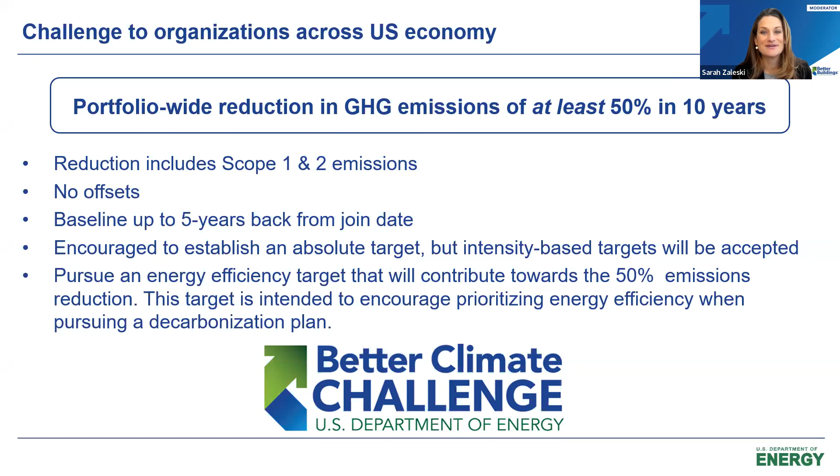Across manufacturing, the public sector, and commercial buildings have already joined the Better Climate Challenge. If you're interested in learning more or joining us, please reach out to your Better Buildings contact or visit the Better Buildings Solution Center.

Next slide, please. I also wanted to share with you a program called the Design and Construction Allies, which was launched last year. This is a program of leading architects, engineering, and contracting firms that are committed to helping enable routine design and delivery of zero energy and zero carbon ready buildings, and to identify and address barriers to delivering these buildings.

So we know that architects, engineers, and contractors are crucial and important to buildings because decisions made by these folks impact buildings' energy use, their carbon emissions, operating cost, and comfort. And I'll note that it's both operating carbon emissions as well as embodied carbon that these stakeholders can have a really important impact on.

So we see this community playing a key role in helping building owners, many of whom I know are on the phone today, achieve their energy and climate goals. We'll be hearing from one of the members of this ally working group later in the call today.

I wanted to share this because two of the areas this working group has chosen to focus on in the next couple of years are: one, cultivating client demand — really being able to share with their clients the strategies, including financing strategies, and ways to make it pencil out to build and retrofit ultra high performance buildings. The other working group is really focused on embodied carbon, so we'll be hearing a little bit more about that today, and obviously it's the focus of today's webinar.

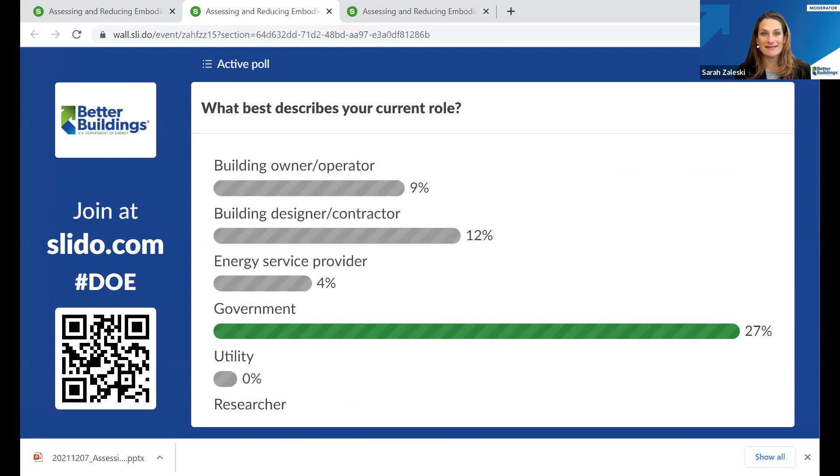So we'll have two more quick polls. One, what is your level of familiarity with embodied carbon? This is kind of from one, I've never really heard of it, two, general awareness of what embodied carbon is, three would be basic understanding of what it is and how to choose what low embodied carbon opportunities exist. And then after that, really a solid knowledge or really considered an expert in embodied carbon and implementation.

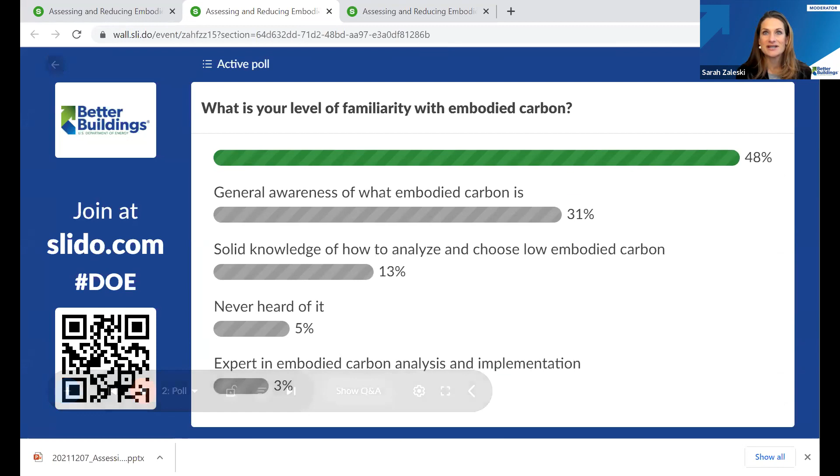This is very helpful. Thank you all for taking the time to share this with us. Okay, so it looks like about half of you are about in the middle, some basic understanding of the opportunities. And there's about a third of you all that have a general awareness of what embodied carbon is. And then we have, it looks like 2% of us on the call are experts in this space. So thank you for joining us as well. I know it's a rapidly evolving space. I know here at DOE, we're thinking more and more about this space, whereas traditionally we've been more focused on operational carbon. So it's a pretty exciting and evolving area.

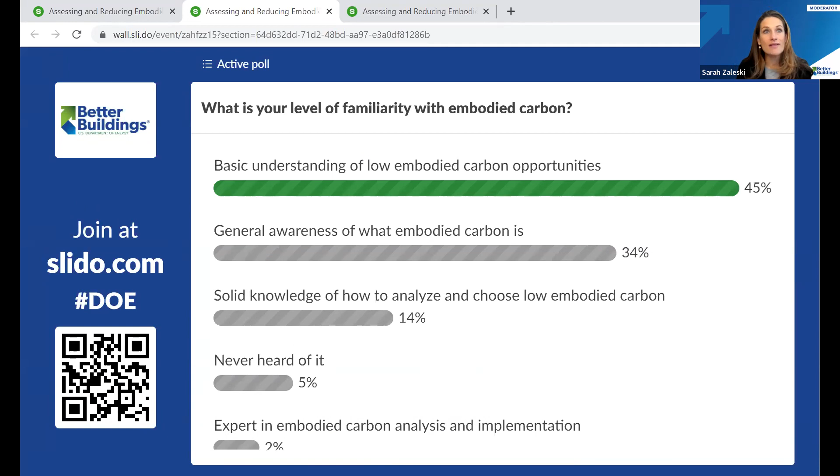Okay, and then one last poll before I introduce our speakers. So what are you most interested in learning today? Feel free to choose more than one response here. So everything from what embodied carbon is to why it's important, where to find resources to learn more, and how to make decisions to lower embodied carbon in projects.

Okay, thank you for this. So it looks like the clear winner is how to make decisions to lower embodied carbon. So I'm pleased to say that I know what our presenter is going to be presenting today. And I think, and I know that we're going to be able to discuss that in some depth. So that is great to hear.

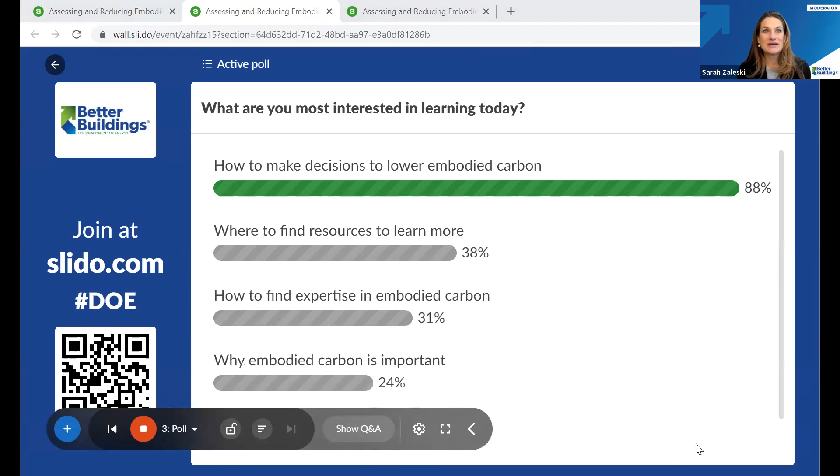All right, without further ado, I am excited to present today's great lineup of presenters. So if we can go to the next slide. The first speaker we'll be hearing from is Victoria Herrero-Garcia, and she is a senior sustainability and carbon project manager for Ambient Energy, a Mead and Hunt company. She enjoys initiating embodied carbon conversations with design teams early in design and helps develop sustainability strategies to achieve carbon reductions. So Victoria is going to really be giving us a bird's eye view. She's worked in this space for quite a long time, covering what embodied carbon is, why it's important, some of the tools out there, how to think through some of the methodologies.

After Victoria, we'll be hearing from Ryan Poole, who leads sustainability for DPR Construction, which is a technical builder with offices spreading globally. DPR is innovating sustainable practices for how they operate, build, and ultimately help change the world. Through strategic partnerships, Ryan harnesses the power of collaboration and unity to provide influence towards creating a healthier future for all. So Ryan's going to really be giving us some additional tools and look at it from the contractor perspective, and what kind of value the contractor can bring to reducing embodied carbon in your projects and some of the tools that they've used at DPR.

And then lastly, we'll be hearing from Anna Duffy. Anna is a sustainability manager at Hudson Pacific Properties with years of experience in commercial real estate ESG programs. In her current role, she manages key sustainability initiatives such as driving progress towards Hudson Pacific Properties' science-based targets and net zero waste by 2025. She also furthers the company's decarbonization strategies, including efforts to reduce embodied carbon in both their developments and redevelopments. And we'll be hearing from Anna really from the building owner and developer perspective of some of the steps that they've taken at Hudson Pacific Properties to reduce their embodied carbon, and some resources available to building owners to do the same. So thank you again all for joining us today.

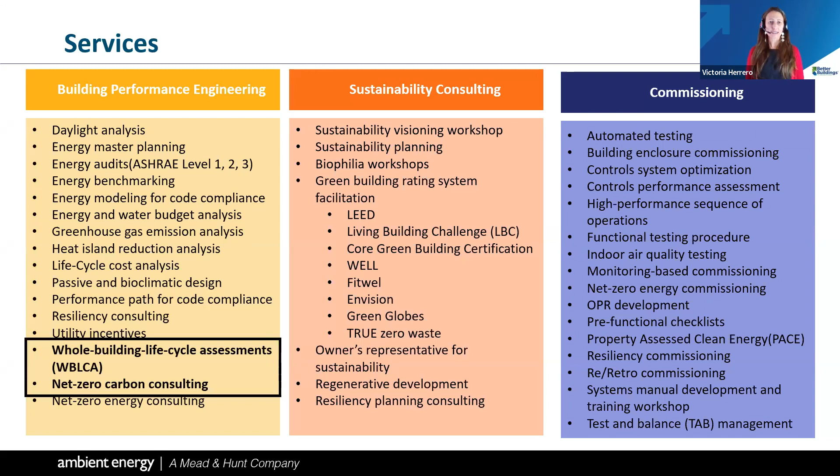To start with the differentiation of what operational carbon and embodied carbon is, for those not familiar: operational carbon is the carbon that is emitted once the building is completed and occupied, and is related to the operations of the building. The embodied carbon is all the emissions related to the materials being used in the project, transportation, installation, replacement, and end of life.

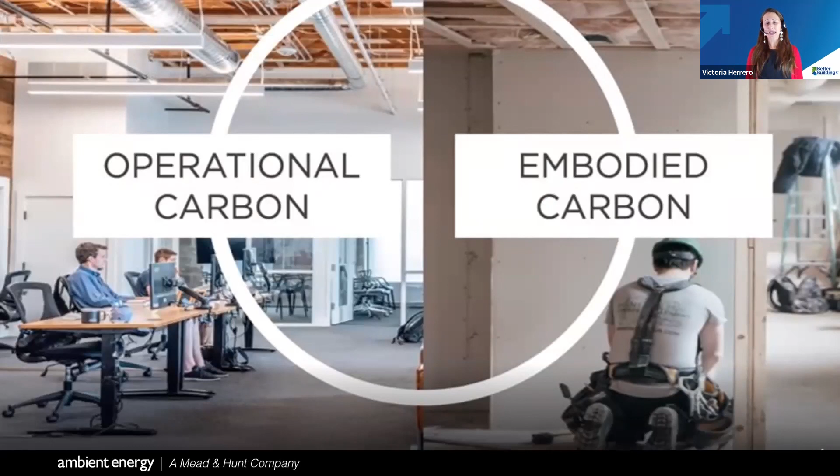As you can see here, that is what I just described. The embodied carbon includes all these stages, including extraction as well, and is also known as global warming potential, GWP. The unit of measurement is kilograms of CO2 equivalent, and the little 'e' comes because it can include other greenhouse gases, not just CO2.

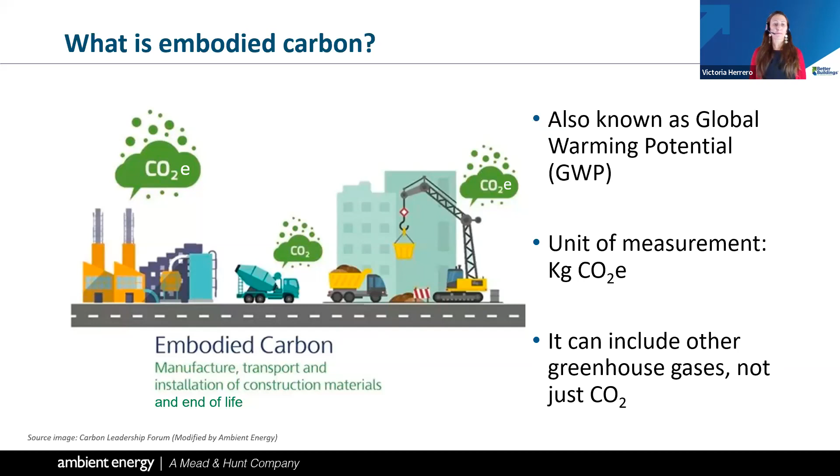Why does embodied carbon matter? When we look at the big picture of global emissions by sector, we can see that the yellow part of the pie accounts for 11% if we only talk about core and shell. But when we include other building materials, we come to a conclusion that it's about 21% of the total global emissions.

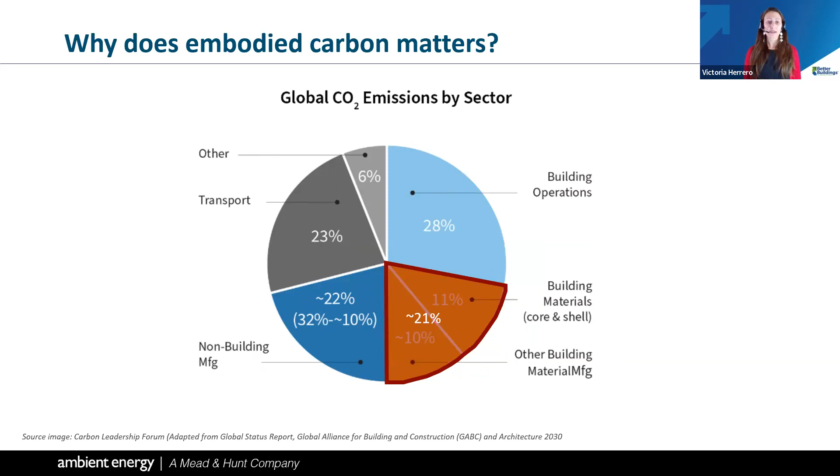It's very important to be aware of this, because we are projected to add 2.5 trillion square feet of new construction within the next 39 years. That means building an entire New York City every month, approximating to 468 New York cities total. That is a lot of new construction.

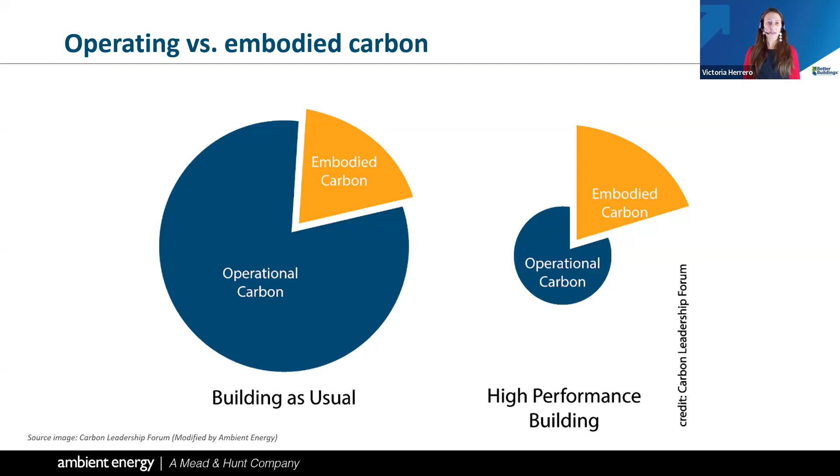As you all are aware, climate change is the single greatest challenge of our time, so we need to know what we can do today.

From the last Glasgow COP26, there was a report generated by the Climate Action Tracker. There's a lot of information here, but the key things I want you to look at are the different scenarios using policies and action, 2030 targets, pledges and targets, and where the global warming will end up under each scenario.

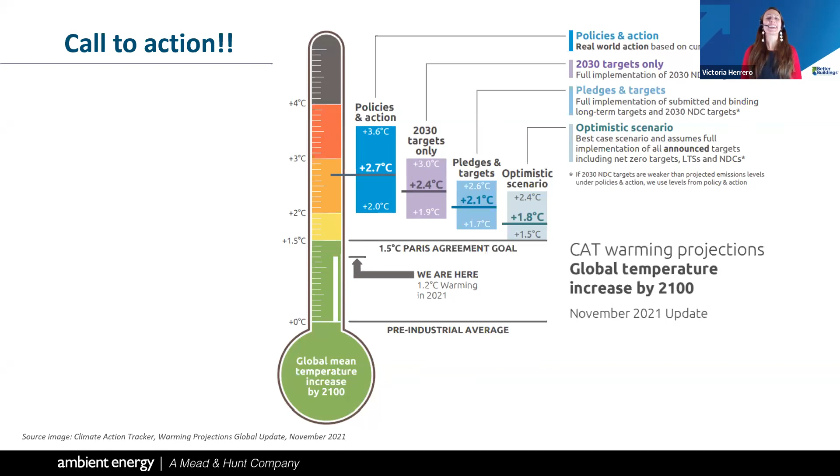The most optimistic scenario is that if we do everything that has been announced, all the targets and policies in place, and generate long-term strategies, we can get to 1.8 degrees Celsius, which is a little bit higher than 1.5, but that is where we're trying to get.

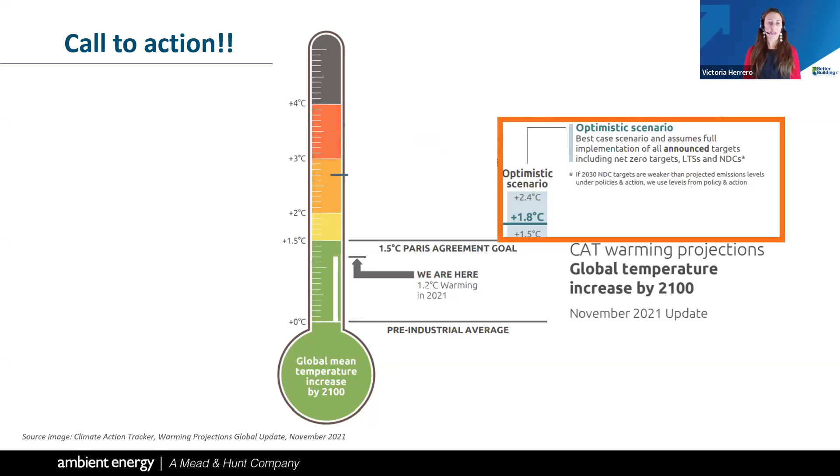So where we are today, here in the United States: you can see on this map there is a state Buy Clean legislation that has passed, and this is all in relationship to embodied carbon. There are other states and cities that have policies, or are trying to pass similar clean legislation.

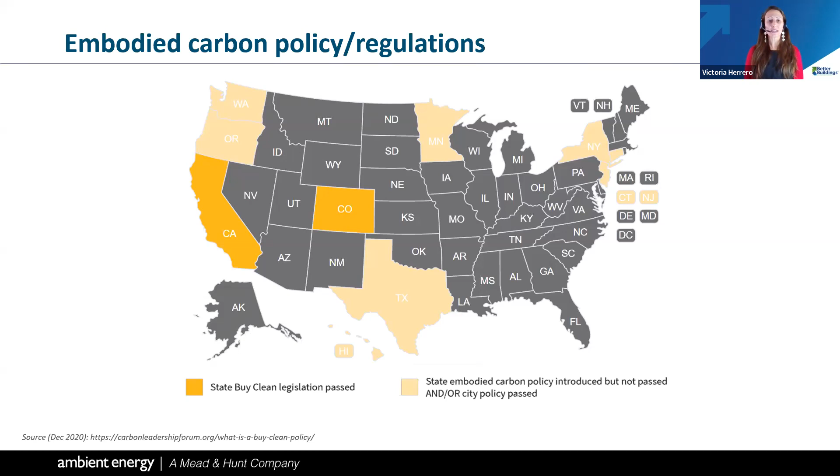If you go to the Carbon Leadership Forum's website and look for the policy, the city policy toolkit has an interactive map where you can learn more about what is being done and read about the policy.

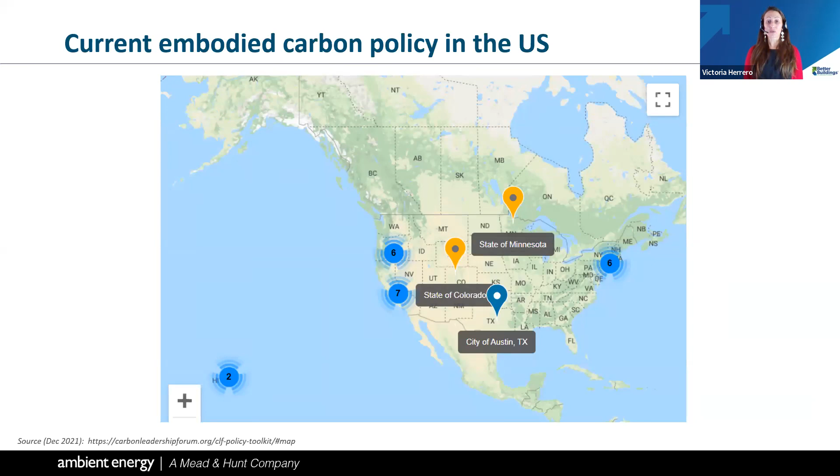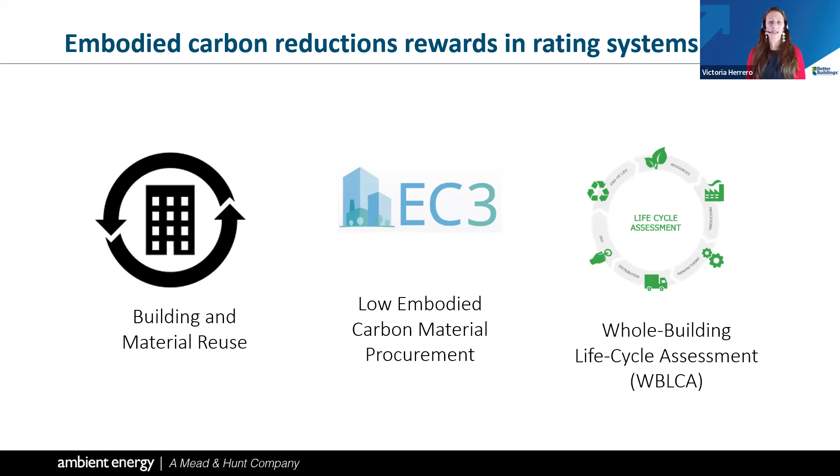With all that, where do we start? We cannot reduce what we cannot measure. There are two measurement approaches I want to discuss today: one is the procurement of low carbon materials, and the other is the whole building life cycle assessment.

For the procurement of low carbon materials, we need to understand the global warming potential impact of each material or product. For that, we need to understand an environmental product declaration, which is a report that is like the nutritional label giving us information about the environmental impacts of that product.

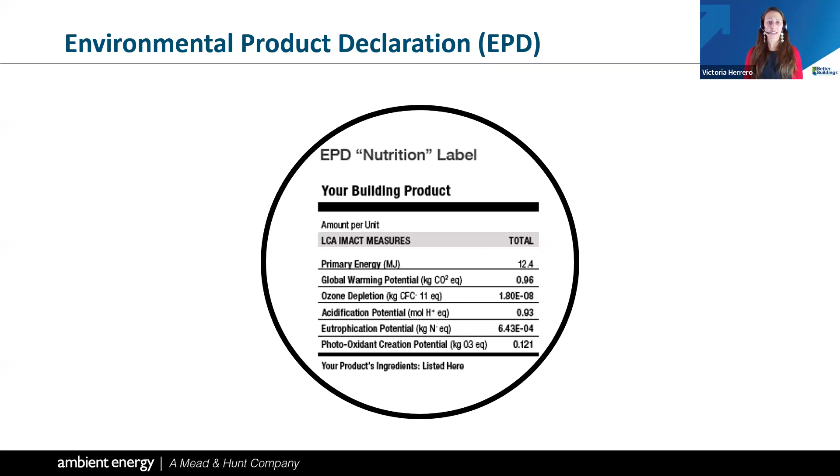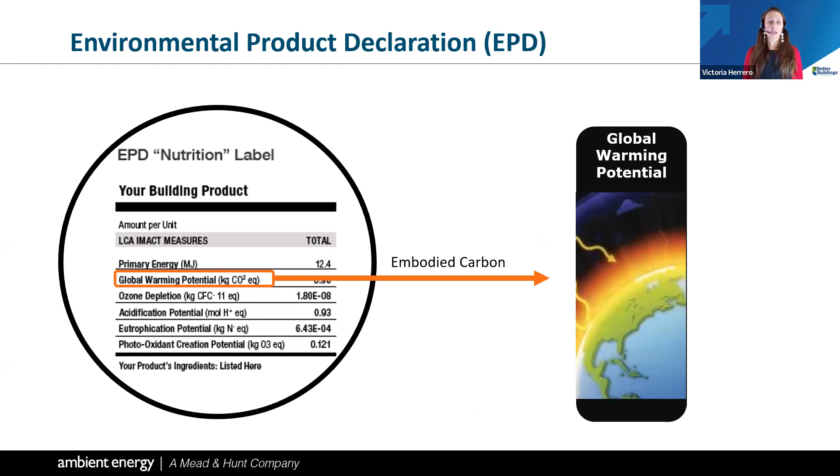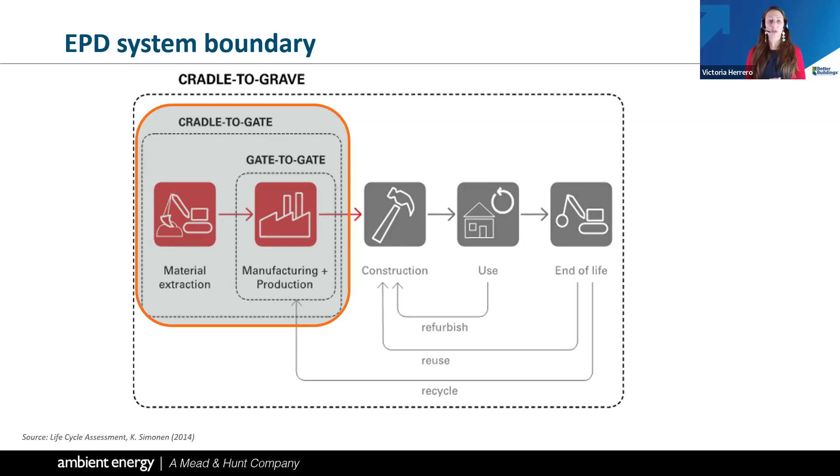The point of discussion today is embodied carbon and the global warming potential of that product. That means understanding the environmental product declaration system boundary. There's a few terms I want you to know. Cradle to gate is the most commonly used system boundary for an EPD.

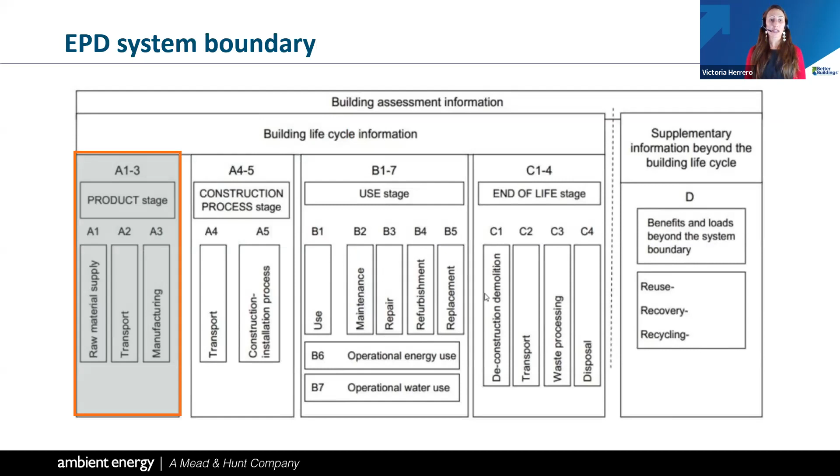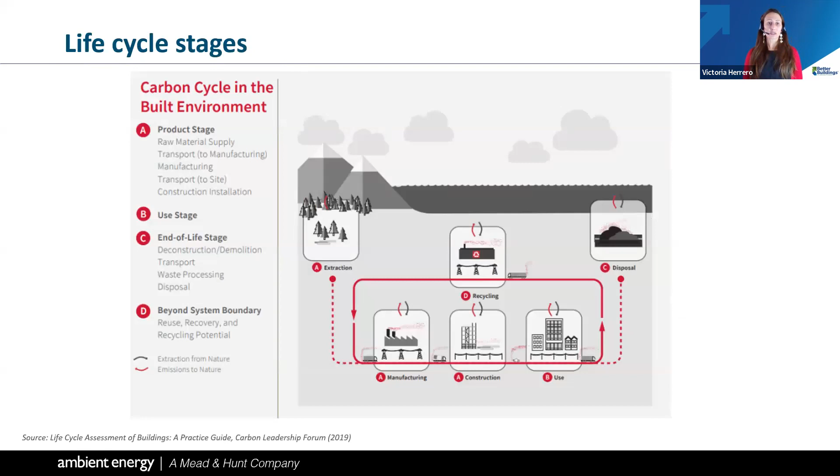Cradle to gate includes the product stage only, modules A1 through A3. That means life cycle stages. The product stage only includes raw material supply, transport to manufacturing, and manufacturing itself, which is why it's modules A1 through A3 only.

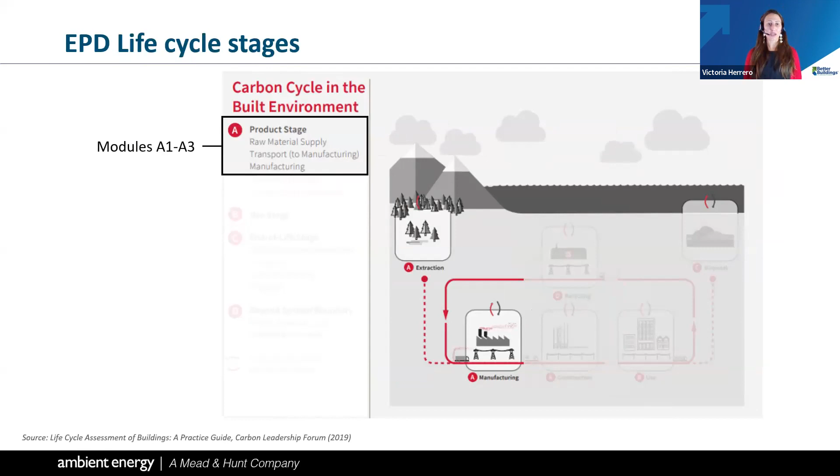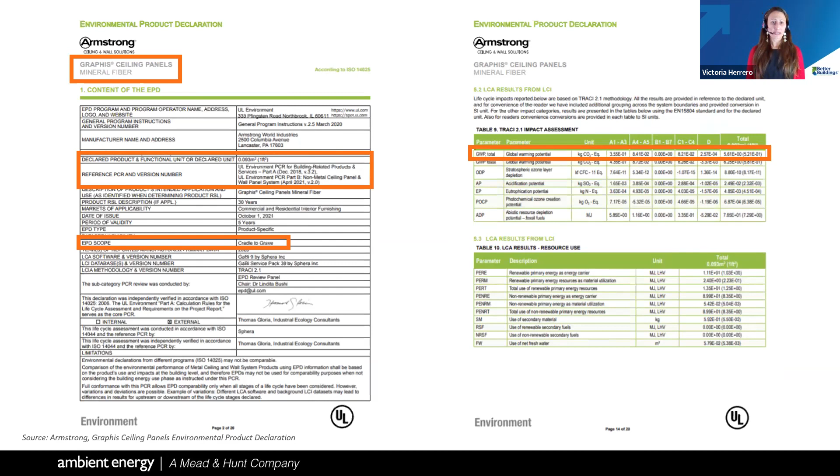So how do we compare EPDs? We have the nutritional label with all this information, but we need to make sure the declared unit is the same, the PCR is the same, and the system boundary is the same in order to compare them.

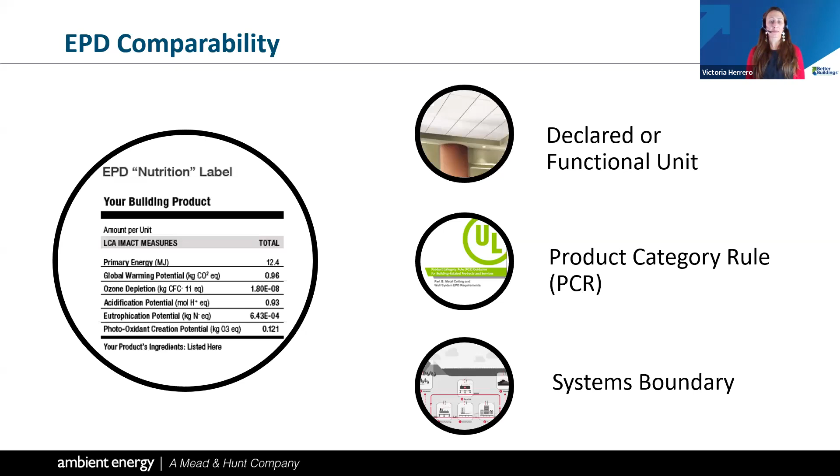There are available tools out there, free to any user. One of them is the EC3 tool, and the other is the One Click LCA Planetary. They both use system boundary A1 through A3, and they have the same functional unit and the same PCR.

The next one is whole building life cycle assessment. This is a design comparison between a baseline and a proposed case, and the scope can vary depending on the rating system. It can be only building enclosure and structure, or you can also include interior materials.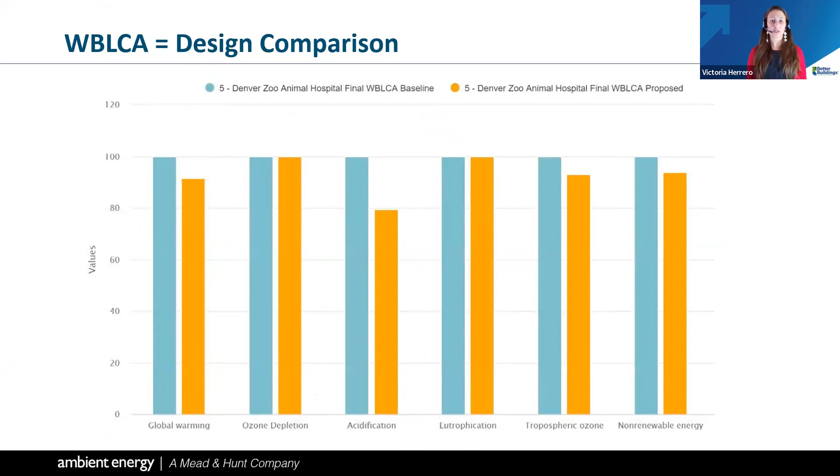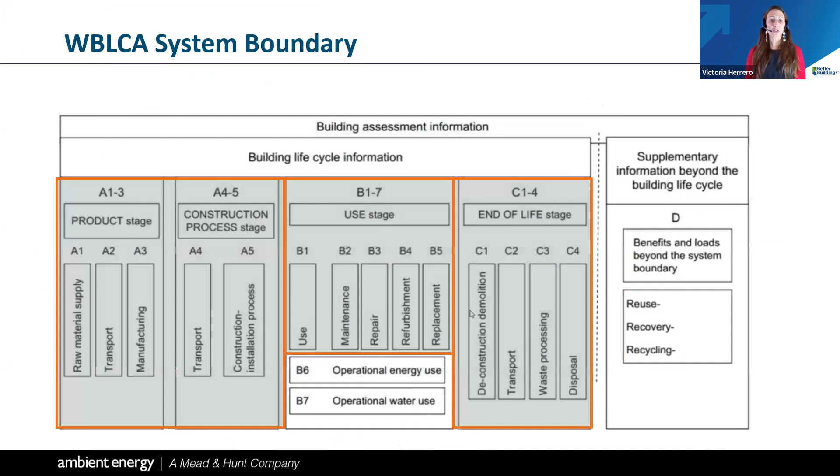The whole building LCA system boundary is cradle to grave, which means it includes A1 through C4 life cycle stages. These are the life cycle stages in general for any product.

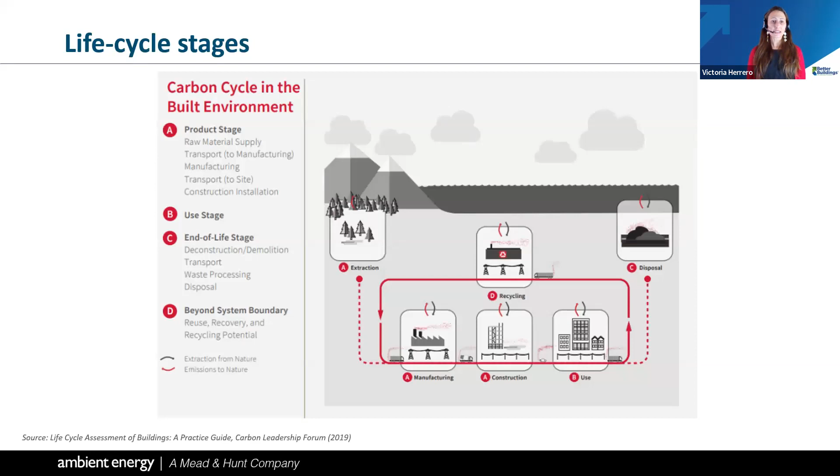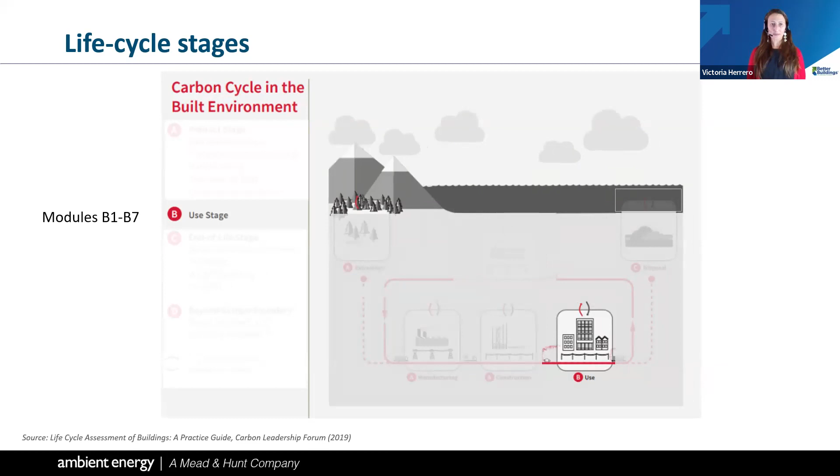Module A, the product stage, also includes transport to the site and construction installation. The use stage is modules B1 through B7. The end of life stage is module C1 through C4. So the whole building life cycle stages in total is cradle to grave, system boundary A1 through C4.

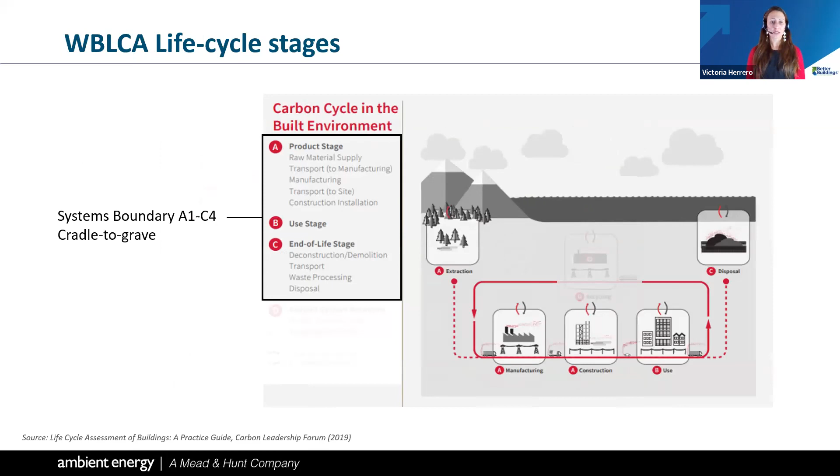I have a call to action for you all to maximize embodied carbon reductions. First, reuse and reduce as much as you can. Secondly, early conversations are key. We have seen up to 40% reductions in embodied carbon by having discussions with design teams at concept design. Set up targets - what is your scope and how much do you want to reduce?

Low carbon procurement is very important because, at the end of the day, the biggest impact square is A1 through A3 life cycle stages - most impacts come from the product stage. And then include all disciplines: the client, design team, and builder estimators are very important in early conversations.

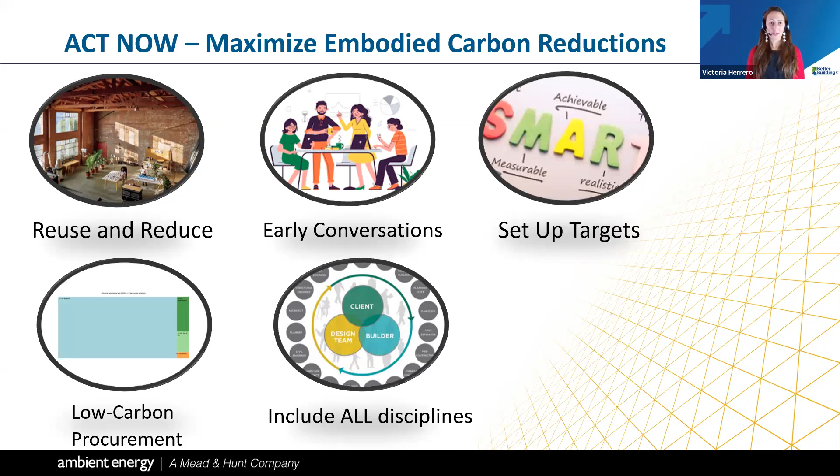A little bit more about assessing and reducing embodied carbon from the contractor's perspective. Victoria did an incredible job talking about the material procurement side, which contractors have a huge handle in, but I also want to dive a little deeper into the actual operations on a construction site, because that's a big piece of our embodied carbon that we don't want to forget.

So what we're going to use today to discuss this is a framework built within the BuildingGreen organization, from the Sustainable Construction Leaders Group, called the Contractor's Commitment. Excited to bring this here to you today. An incredible group worked to put this together, and it's got several different categories: carbon reduction, job site wellness, waste management, water management, and materials.

Today we're going to focus on all the ones that reflect on embodied carbon, so we won't go into job site wellness. We'll also show a little bit about how that tier system works.

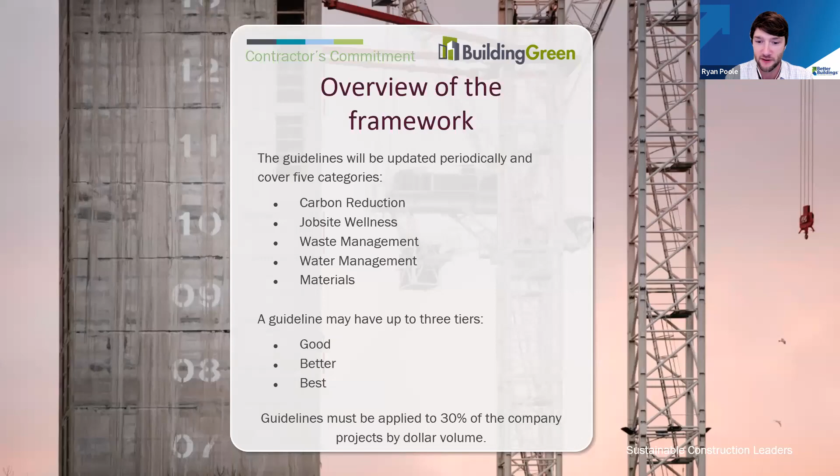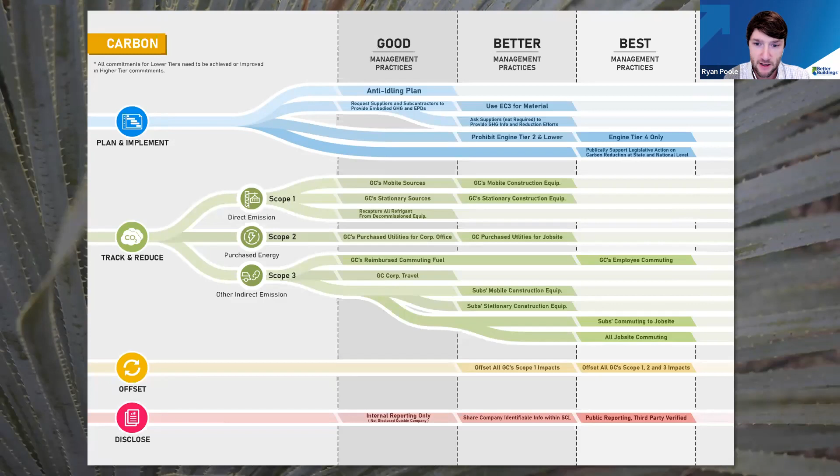Planning here, you can see things such as Victoria mentioned earlier around EC3 for material selection, as well as utilizing certain types of equipment - driving towards electrification - and even getting into scope 1, 2, and 3 for our individual organizations. So not just looking at what we're doing on the construction sites, but what we're doing at a corporate level too, how we're actually operating as businesses, as contractors, and things we can continue to do to improve there.

So what I'm going to do is, after showing some of those, go through some specific examples that we're doing at DPR to help champion some of these things.

One of the things we want to make sure is really paramount to everybody is that the most sustainable building is one that already exists. So adaptive reuse can have a huge benefit on lowering embodied carbon because you already have a lot of the materials there. As operational emissions drop with adoption of renewable energy, embodied emissions - those attributed to building materials and energy for construction - will likely dominate new building emissions by 2050.

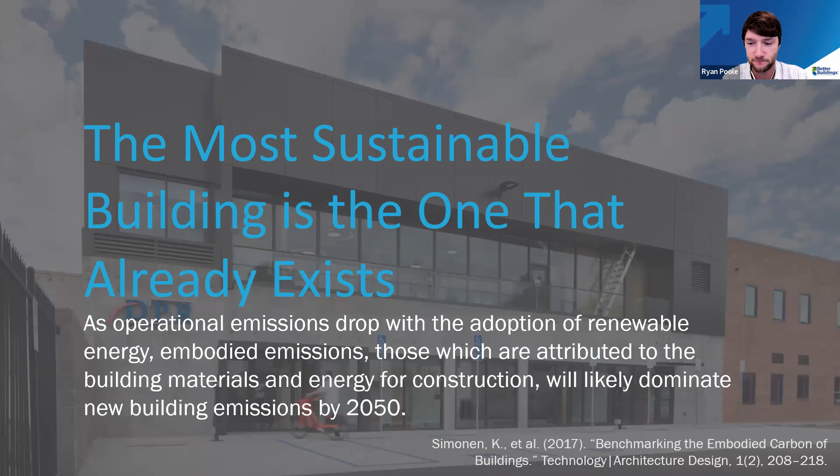Here I'll show a little bit of a graphic. As Victoria mentioned, on the left-hand side we've got the 11% of embodied carbon that comes from building materials and construction, and she even showed an even greater percentage than that. What we've got is showing you the progression of adaptive reuse, from building nothing at 100% reduction of our embodied carbon, all the way down to just building efficiently. You can see the massive difference in impact from where you use adaptive reuse to new raw materials.

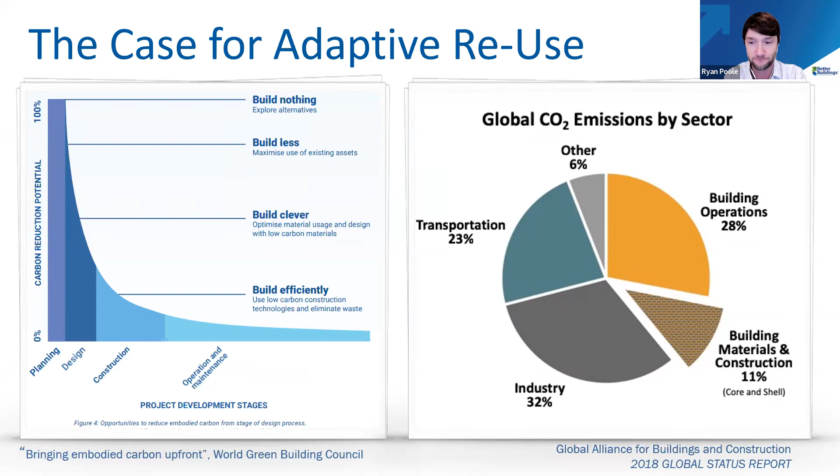At DPR, we believe it's our responsibility as contractors to help show our clients the way too. So we've taken it upon ourselves to have 6 of our own offices as net zero energy. These are all in different climate zones, and we're continuing to add more to the portfolio.

San Diego here was our first one all the way back in 2010, before we had rating system certifications for net zero energy. We had Phoenix, which was the largest of its kind when it was certified. And then all the way over to DPR Sacramento here, which is our most recent one, which was mass timber. So we'll do a little deeper dive into the embodied carbon study we did on that specific office.

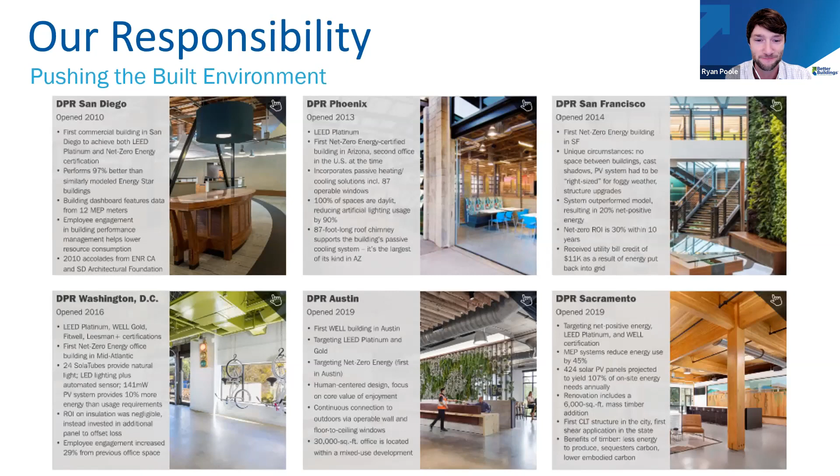Waste management is something that gets kind of pushed to the side when we're talking about embodied carbon, but it's a massive part of it. It can clutter the environment we live and work in, but also causes a lot of emission issues on the back end.

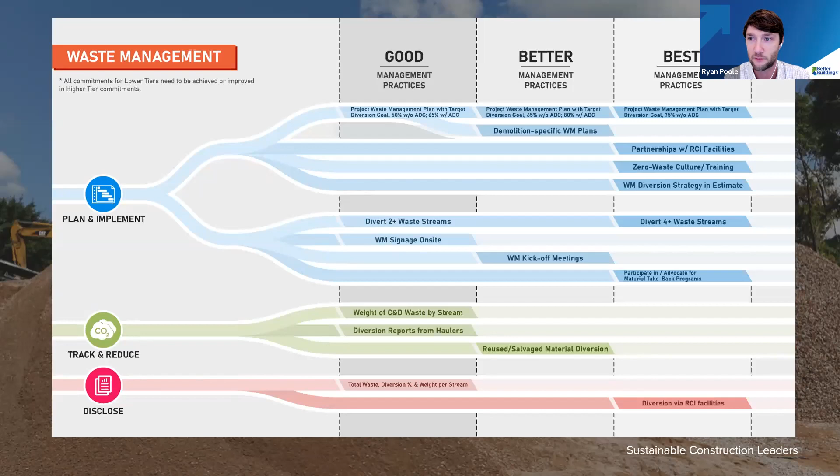We want to make sure we're addressing that head on and driving a zero waste culture on our job sites. Here you can see where we've tried to provide contractors guidance on implementing the right plans, selecting the right partners, putting the right cultural pieces in place, and then reporting and disclosing that information as an industry together so we can have constant improvement.

Here are some examples of how we've been striving to drive a zero waste culture on construction sites. First and foremost is always having a waste management plan. It's important to communicate that all the way from having the right partners on the front end, your design partners, your consultants, your owner, and the vendor you're going to use for waste collection. Those are all key factors to make sure you have early collaboration and set the right expectations.

It's important that this is educated and communicated through all of the folks coming onto the job site and helping build it. So having the right presentation for orientations as craft come in, the right signage, the right setup—it's got to be multilingual. That's going to have the best impact, making sure you have all the things you need for the right recipe to create a zero waste culture.

Here you can see some examples of signage that we have, a logistics plan, and also addressing the problem. It's important not just to tell people what we're doing, but why we're doing it and why it matters.

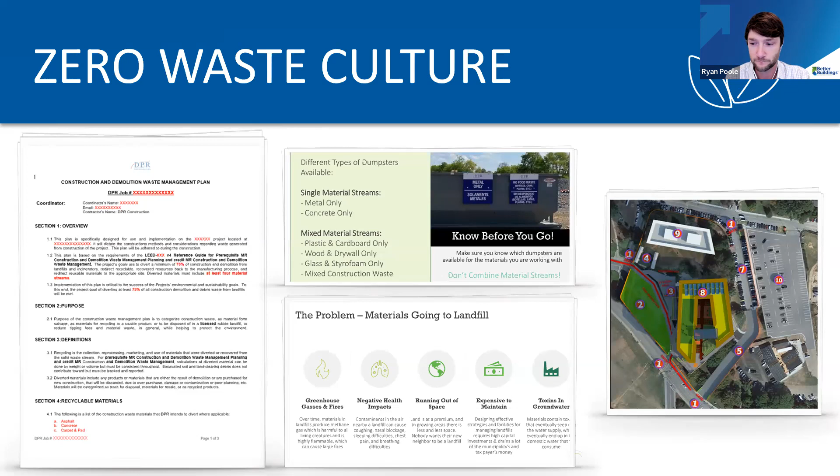Lean construction practices—this isn't just within construction, it can really be a way of life in any role you currently serve in. Lean is all about designing waste out of a process.

We're excited to have a lean leadership course at DPR, a lengthy course that teaches you how to design waste out of the processes you do every day—the proper planning techniques, the proper things to be conscious of, and the tools you need to continue to eliminate waste out of our everyday processes.

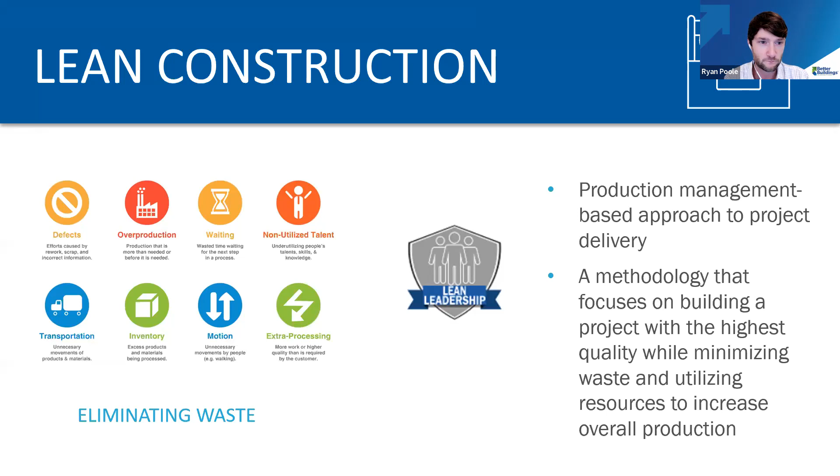Not only does it lower waste, but it also improves precision and quality, allowing us to have a lower carbon footprint because some of these facilities can operate with renewable energy. That can drastically cut down on the overall carbon footprint from the materials we're selecting.

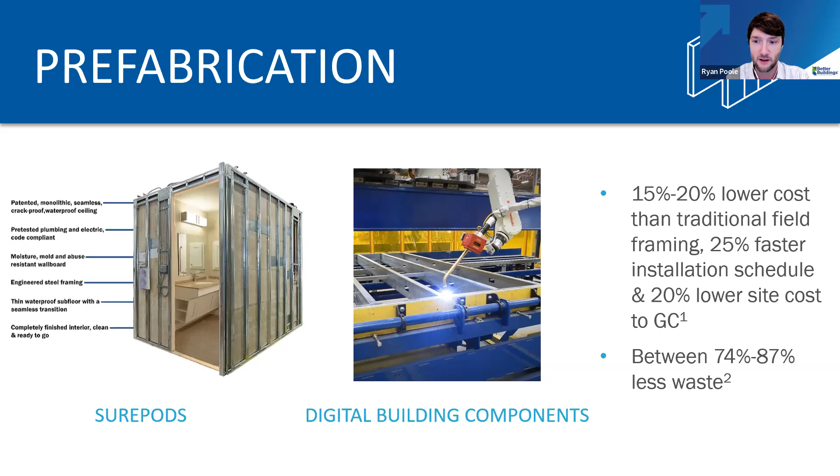These can be plugged and played into all kinds of different scenarios. A lot of the work within a space goes into restrooms and kitchens, because they have so many intricacies in their elements. Prefabrication can have a huge impact, not just on speed to market, but really on driving down embodied carbon.

Water always gets tossed aside when we're talking about embodied carbon as well, but it's an incredibly important factor—not necessarily from an emissions perspective directly, but from transporting the water. The more we continue to be conscious of conservation and reduction of our water sources, the more we save water, which has its own problems, but also save the energy it takes to transport that water. We're excited that we're addressing that here.

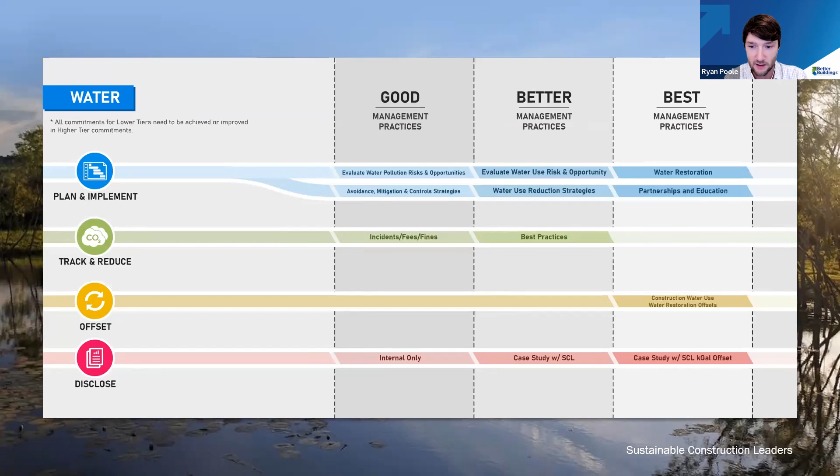One of the innovative solutions I'm really excited to share with you guys today is a concrete truck washout reclamation center that we've implemented on one of our job sites.

You have several different activities that use massive amounts of water on a construction site. The more we can find solutions to use rainwater capture to eliminate the usage of potable water that has to be transported to the site, the bigger the impact on our environmental assessment. This particular center was able to save 13,500 gallons of recycled water in just one day, which adds up to over 2 million gallons throughout the life of the project.

No potable water was used. We used rainwater capture and treatment for these activities, with massive amounts of energy saved from not having to transport that water to the site, which in turn reduces our embodied carbon.

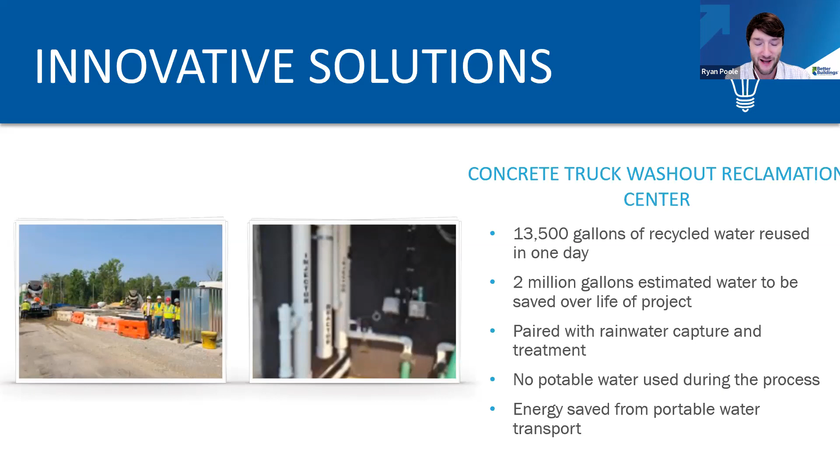Material selection is something Victoria covered so well, so I won't go too deep here, but it's definitely important for us to address as contractors since we're on the procurement side. It's incredibly important to have early engagement with the design team to select the right tools and materials that provide a healthy impact on the planet and the people that live in it. We're looking at a full circle from a health and wellness perspective, but also how EPDs can continue to drive transparency in the market.

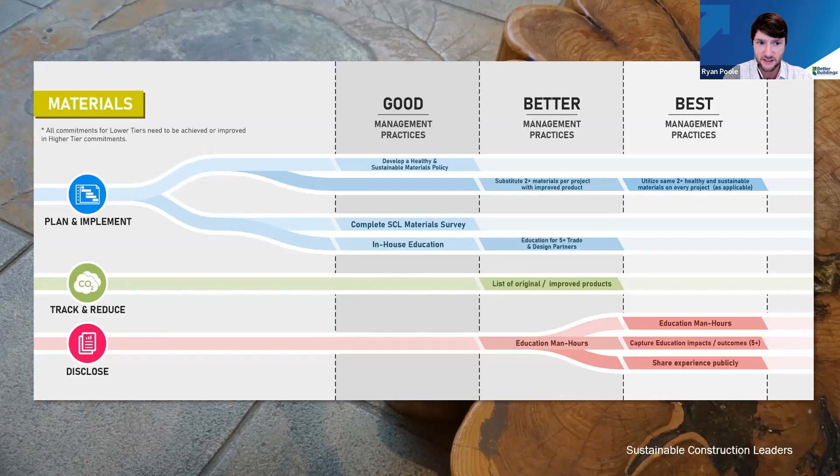Here's an example showing the total carbon impact. What I really wanted to illustrate is how much of that the structure can be. You see substructure and superstructure take up over 50% of the actual embodied carbon within a space, so I want to put some special attention on the structural components and what we're doing to be innovative there.

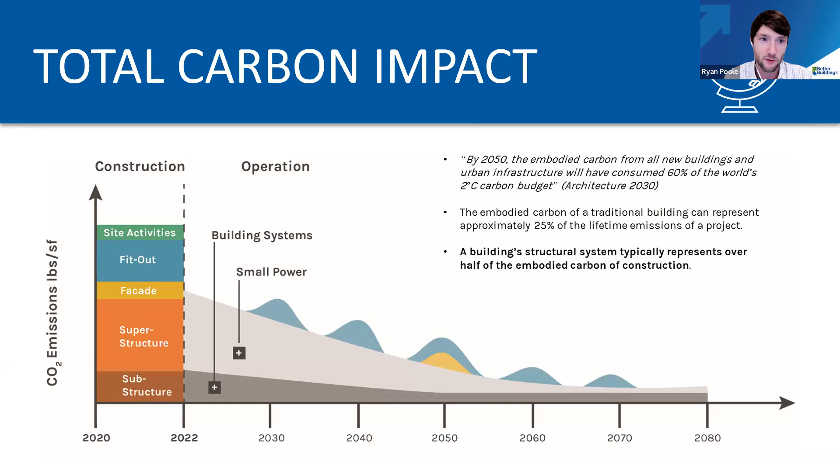Victoria gave a great illustration earlier, and this is another example showing some of the main structural components we use in buildings: steel, concrete, and wood. Wood is highlighted a bit more because it's one of the only building materials we have with carbon sequestration benefits, a renewable resource that actually sequesters carbon throughout its life cycle. This shows the process of what it takes to extract that raw material, process it, transport it, and get it to the job site where we put it in place.

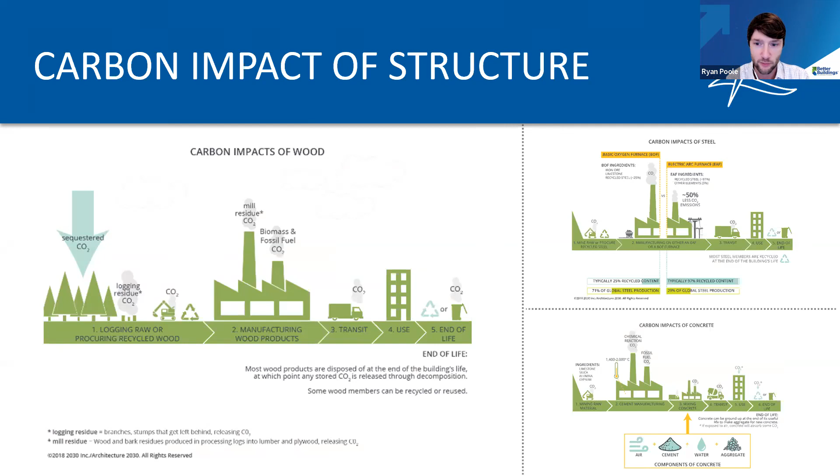Mass timber on our Sacramento office, super excited to share the benefits we were able to receive there. We did a really deep analysis, not only from the embodied carbon aspect but also from health and wellness, so multiple benefits. The amount of embodied carbon we saved from utilizing this beautiful mass timber saved the equivalent of 33 cars off the road each year, or the energy to power 14 homes every year.

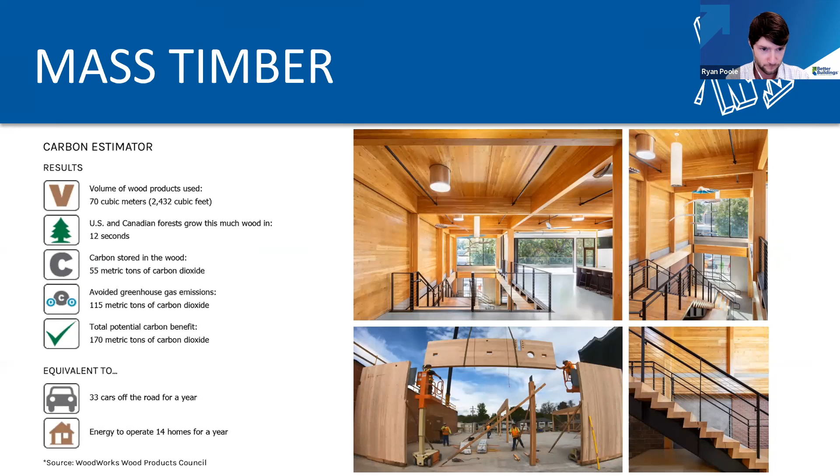It's incredibly important to leverage data management because we have such vast amounts of information to discuss and communicate as we work through project teams together. Victoria already hit on a bunch of these incredible solutions: Tally, EC3, Athena, and Carbon Smart Palette. We also use some other in-house tools that help us track waste management and the carbon within our materials, and we have an online database that allows us to shop for products with that transparency. They provide the EPDs and HPDs we need, and we know they're made responsibly by a company pushing healthier products.

At DPR, we've created our own in-house practices and tried to revamp those to marry up with this incredible commitment we have with the Contractor's Commitment at Better Buildings. It's an impactful piece that tells all of our people in-house why sustainability matters to us and the planet, how it impacts us and the planet, and provides consistency, benchmarking, and prioritizing to show all of our folks the right way to champion these efforts.

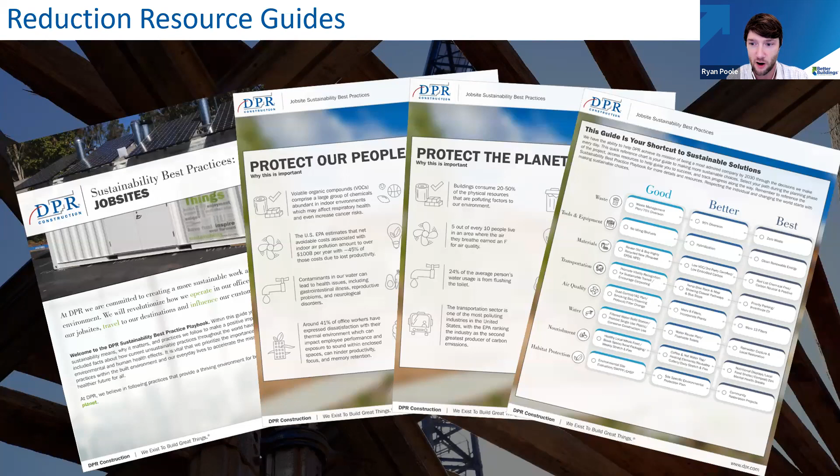Here we provided a deeper insight into how you actually go and accomplish some of these things. We've got all kinds of incredible links that provide our craft and leaders in the field with direction.

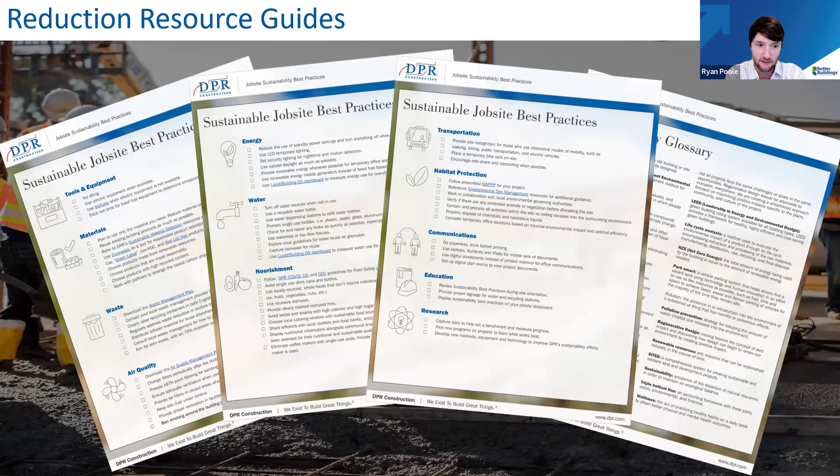So how can you participate? If you're one of those 12% of contractors we had on the call today, please join, go check out the Contractor's Commitment, download it, join, sign up. We've also got the Sustainable Construction Leaders Group, and we'd love to have the more the merrier. The more we can spread this and get more contractors on board, the larger impact we're going to make. You can also send some feedback to us at Candace at Building Green.

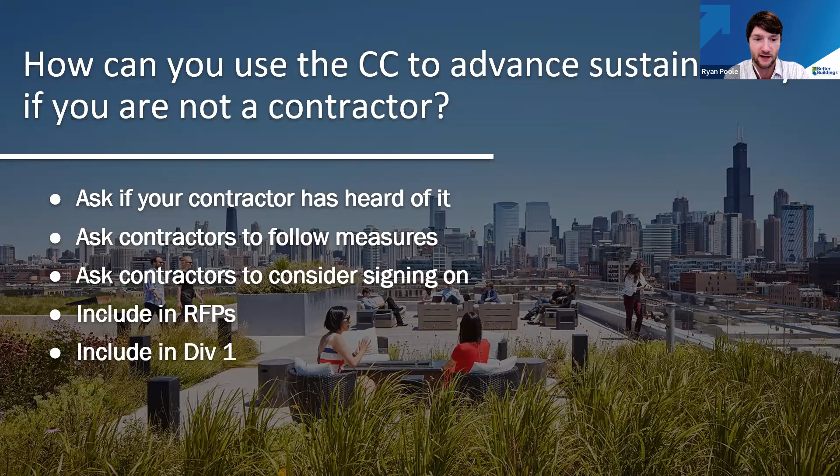And if you're not a contractor, so all the owners and everyone else out there, how can you help advance this? Ask your contractors if they've heard of it. Ask them to follow the measures. Ask contractors to consider signing on, including this in your RFPs. And then if you're a designer, include it in your Division 1 specs.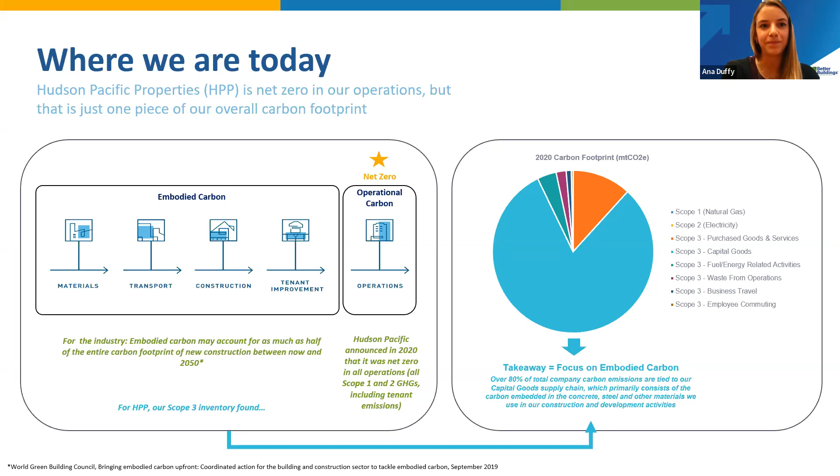So a little bit about our commitment to embodied carbon. In 2020, we published a sustainable design vision that outlines our ESG expectations and aspirations — requirements and then kind of the aspirational goals we try to reach if possible. This policy includes some minimum requirements like deploying adaptive reuse whenever possible. Ryan spoke to the idea that the most sustainable building is the one that already exists, so we've included that in our policy. It also includes achieving LEED Gold certification or higher on all projects and measuring each project's embodied carbon footprint. Since publishing our initial sustainable design vision, we've built a really solid understanding of what the embodied carbon in our development pipeline looks like.

Once we had that better understanding of what that footprint looks like, we were able to commit to creating project-specific embodied carbon reduction targets for each development or major repositioning. What that looks like is creating a baseline, doing a whole building LCA based on the existing design, and then determining how we can reduce embodied carbon as much as possible through that design, whether it's optimizing design or procuring lower embodied carbon materials, and developing an ambitious target to reduce embodied carbon as much as possible.

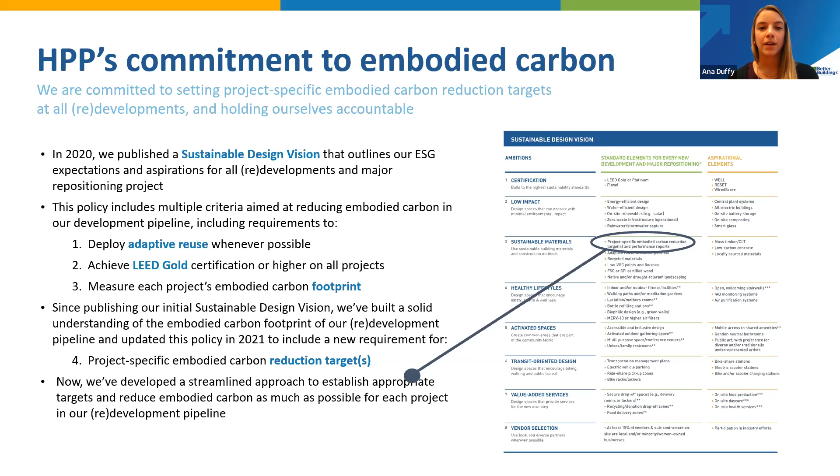We started out with a decentralized approach to figuring out what our embodied carbon looks like. We used a variety of different tools like the Climate Positive Design tool, EC3, Tally, some of these things Ryan and Victoria have already mentioned.

So now we've created a more streamlined approach to addressing embodied carbon in our developments. We're going to work with one third party who's going to be integrated into our development team and our ESG team, and we're going to use one tool so that we can create a streamlined and centralized approach, and be able to address and optimize reductions across all our projects.

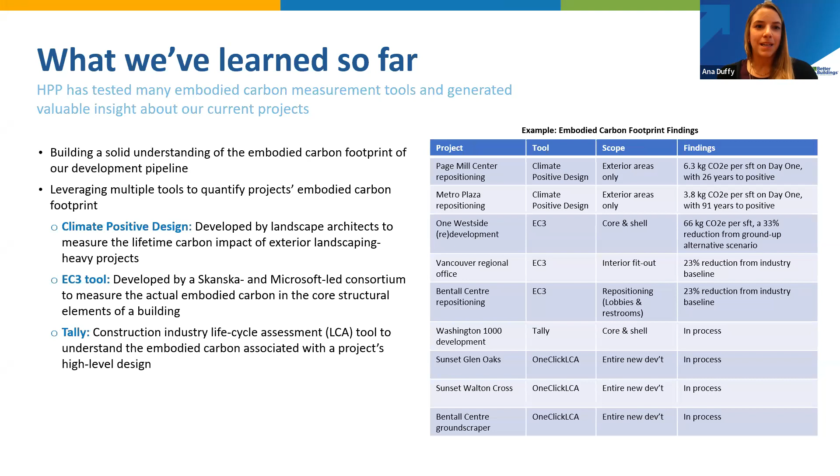Next slide, please. I'll speak to a few case studies that we've completed thus far. One project is an adaptive reuse project in LA. At One Westside, we redeveloped the former Westside Pavilion Mall into a state-of-the-art tech campus that's already pre-leased to Google.

Rather than tearing down the entire structure and building from the ground up, we were able to reuse much of the structural steel of the original mall, and we found that resulted in a 33% reduction of embodied carbon from a ground-up scenario. We completed this embodied carbon study retroactively to find the actual savings, or avoided emissions, that we were able to achieve from this adaptive reuse project, and found that structural steel was a really big piece of that puzzle.

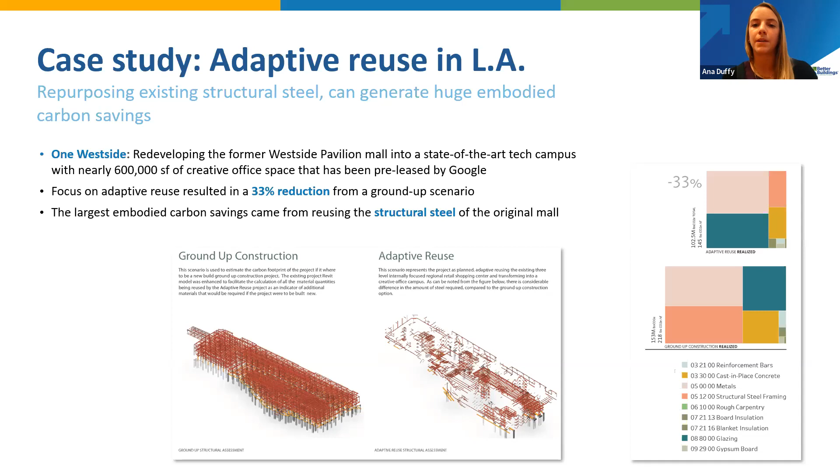Next slide, please. While we have many development and repositioning projects going on at any given time, we also are constantly turning over the interiors of our buildings and building new spaces for our tenants, improving our common areas. We've learned that there are many material alternatives that can reduce embodied carbon in these smaller scale projects, and we can do it with minimal cost, low to no cost impact.

One example of Hudson trying to walk the walk is doing an embodied carbon case study in our Vancouver regional office. We were building out a whole new regional office there, and we had a team that was really focused on reducing embodied carbon. They were passionate about it, and wanted to see how we could procure low embodied carbon materials. So we focused on high impact materials and worked with a third-party consultant to do this. We found that some of those high impact materials include wall systems, ceiling tile, carpet tile, and gypsum wallboard.

Once we focused on those materials, we looked at what we had spec'd and how we could procure lower embodied carbon materials. We were able to reduce our embodied carbon 23% in that project from active procurement decisions, and a really engaged team that drove the process with our consultants, architects, and contractors along the way.

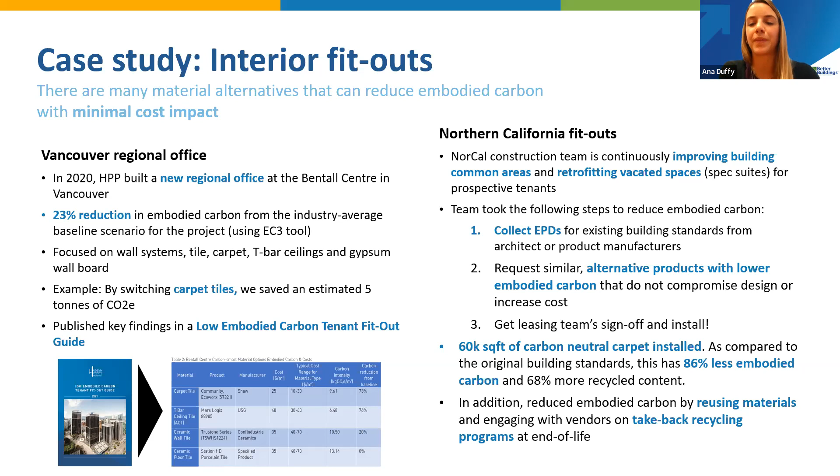And then finally, again, to kind of the adaptive reuse point, they've also started taking a really active approach at reusing materials wherever possible and engaging with our vendors on take back recycling programs. So we've found that we're able to recycle much carpet, a lot of carpet that we're taking out and replacing, that can turn into new carpet. Next slide, please.

So beyond our efforts within Hudson Pacific at our redevelopments and interior fit outs, we really wanted to engage with the industry to share our learnings. And we're excited to join Building Transparency's OwnersCAN group as a founding partner. OwnersCAN is really focused on promoting awareness of embodied carbon, increasing use of the EC3 tool, and creating resources for the industry to more widely adopt embodied carbon studies and address embodied carbon in their own projects.

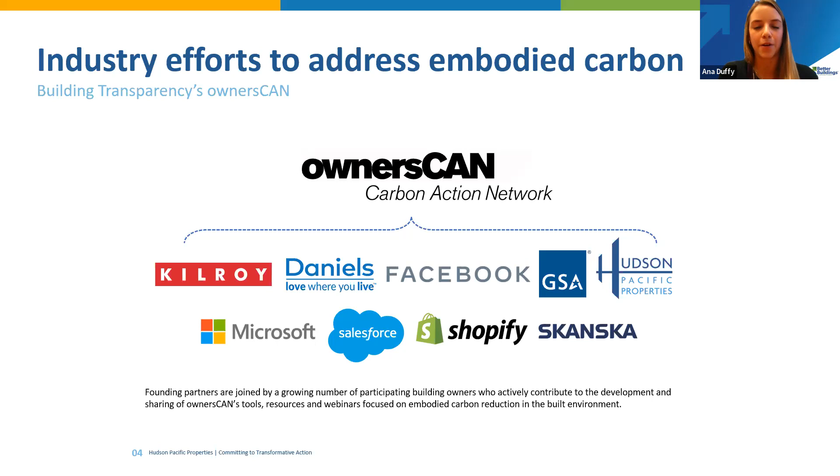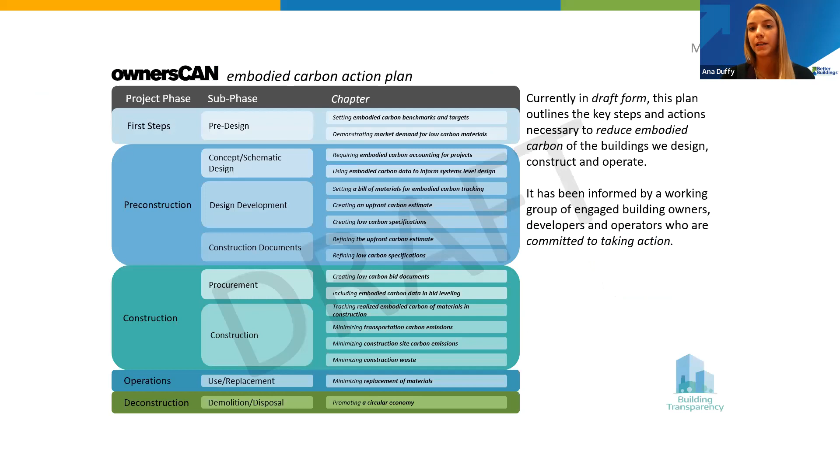So one of our first work products that we put out recently, and you can go to the next slide, is the OwnersCAN Embodied Carbon Action Plan. It is currently in draft form, and we are constantly iterating and improving on it, adding resources to build it out. And it really takes owners through the first steps all the way through to deconstruction, the whole life cycle of a building on how to address embodied carbon. Next slide, please.

And you can find this online. I've provided the link to the Better Buildings team. One of the really cool things about this action plan is that it includes action items for each key stakeholder in the process. So we have the construction manager, Ryan, can go in there and figure out what steps does he need to be involved in to address embodied carbon in a project. We have the sustainability consultant, so Victoria can go in there and see where she has to step in. It's a really great resource to learning how to kind of engage all those key stakeholders in the process.

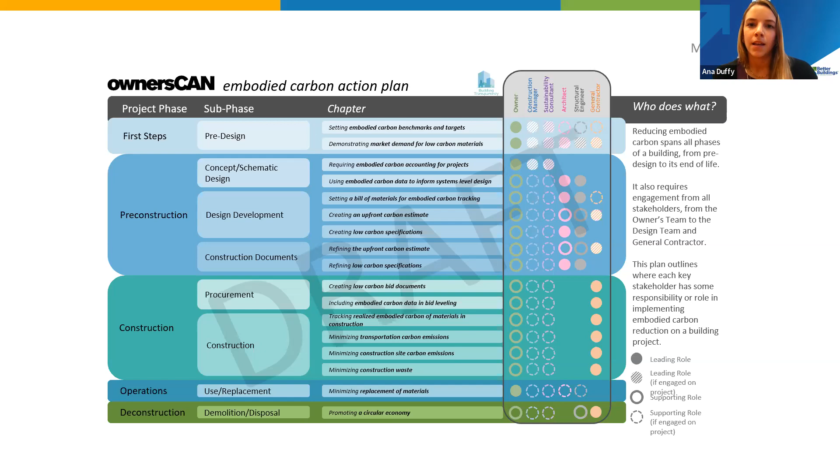To address embodied carbon. Next slide, please. And then it also addresses the different stages of embodied carbon. So at what stages of the development project are you focusing on different life cycle emissions? Next slide, please.

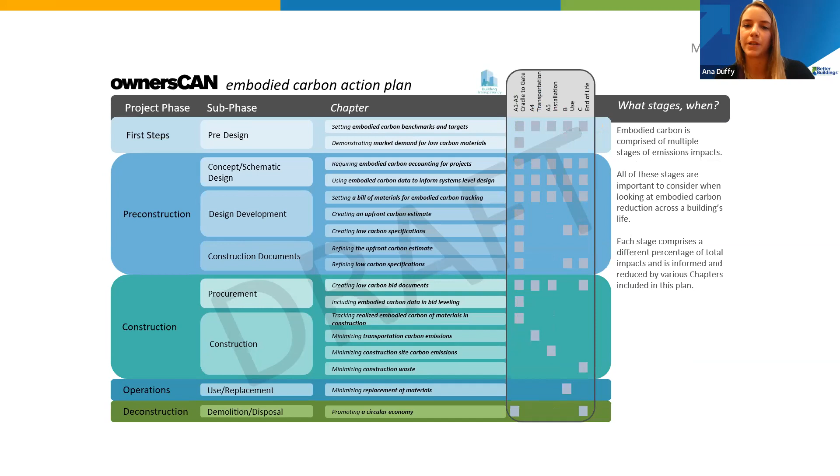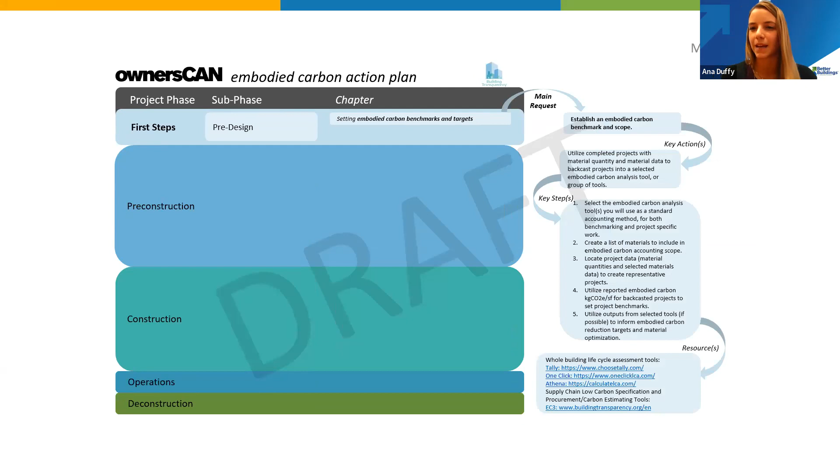And then this is kind of just a view of what it looks like fully built out. So there's an interactive web page online where you can take a look at this, and then you can also download a PDF and kind of just pick out the slides that are most relevant to you. Next slide, please.

So I just wanted to share some key takeaways as we wrap up. I think one of the most important things everyone on this call can do is get educated, figure out what kind of stake you have in addressing embodied carbon at your company, and use the OwnersCAN Embodied Carbon Action Plan or other resources like those Ryan mentioned or Victoria mentioned to understand your role and how you can reduce embodied carbon. Number two, get buy-in. I think we've all spoken to the fact that there are so many stakeholders involved in addressing and reducing embodied carbon. So it's really important to get that buy-in early on, get everyone on board and understanding of what embodied carbon is and what are the steps to actually reduce it.

And then upon realizing new development projects or interior fit outs, consider how you might be able to reuse structures and optimize design to reduce the amount of materials you even need to procure in the first place. Then understand your baseline and what those high impact materials are. And when you're going through procurement or thinking about procurement, identify what lower embodied carbon options are.

And lastly, request EPDs. You can do this easily in interior fit outs. The architects and product manufacturers are very happy to help, and ask them for lower embodied carbon alternates. Demonstrate that your buying power is really important. That's what we've found to be important with Hudson Pacific.

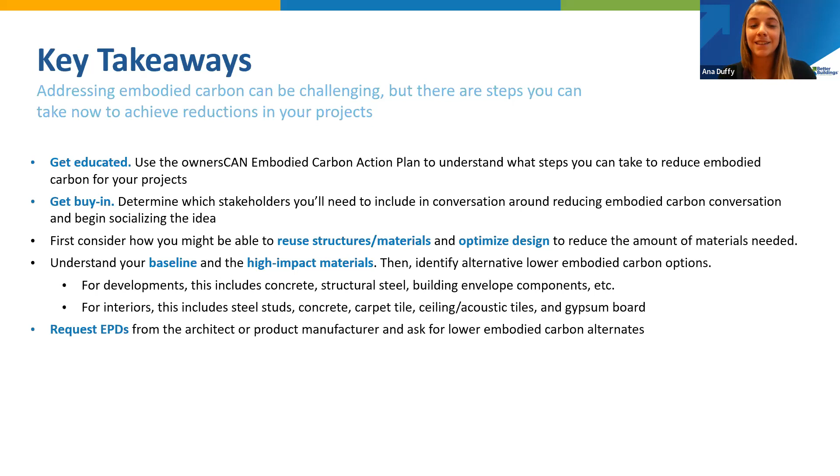And yeah, we're excited to answer some questions now. So I'll turn it back over to Sarah to run Q&A.